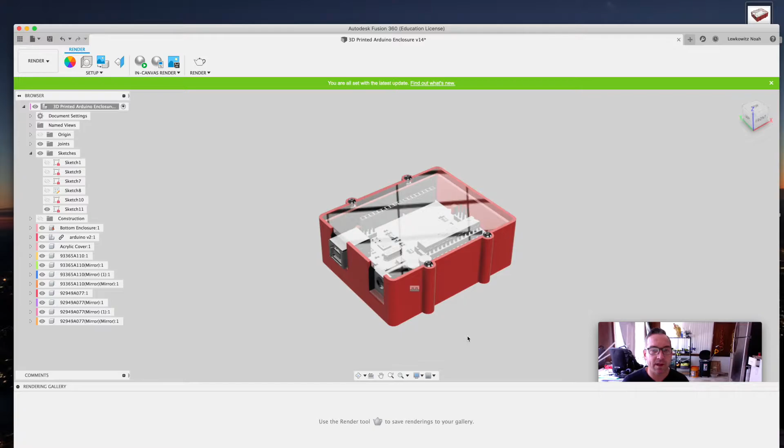And I'm going to show you how to get from where we were last time to this point. So I'll back us all the way up here to where I finished off, which was right here. So we got the cuts in for the Arduino, and that's about it. You can see these rounded sides here. How did I do that, you may wonder? Well, I recognized I wanted to have those added to the part, and you'll see why in a moment.

And the best way to do that was actually to go back in time. This is something you guys should be comfortable with. So what I did was I rolled back the timeline here to when that part was not its own component. So here we are, all the way back in time. It's not a component, it's a body here, body 3.

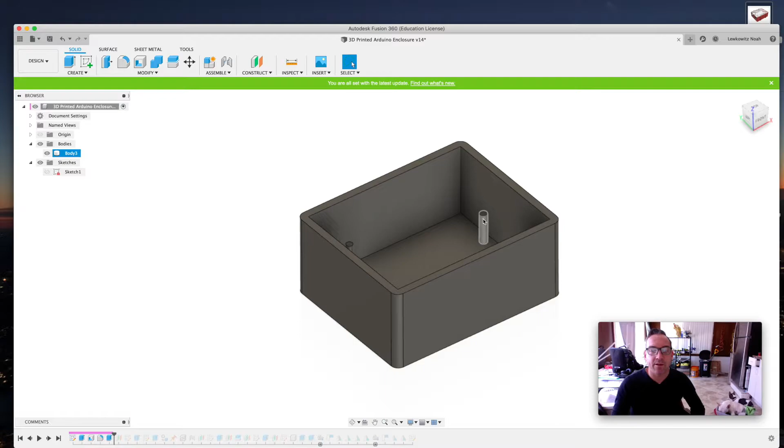I do have the pegs here, but not the standoffs in there. And you can see the rest of the timeline's all set here, but it's grayed out because we can't see it yet. And I brought the slider all the way over here, and this is where I want to begin to do my work.

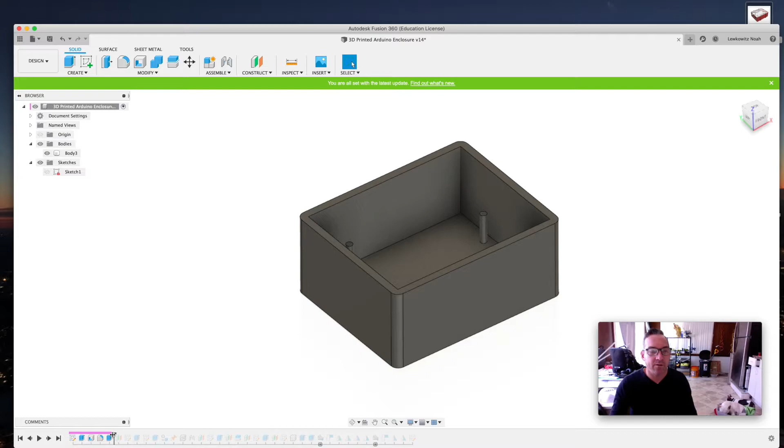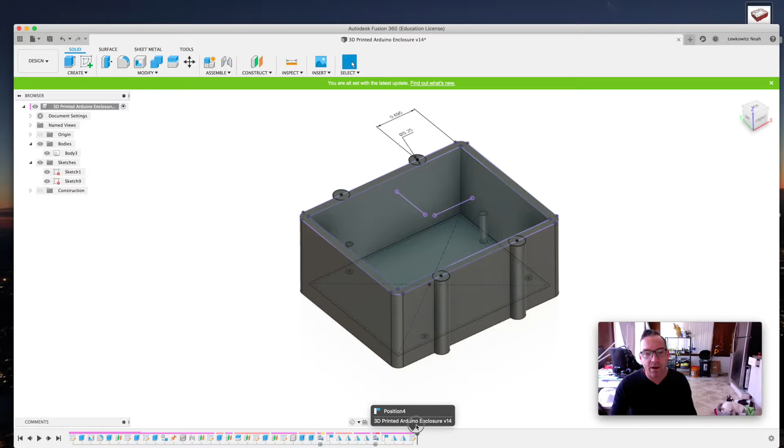So I actually created a new plane off of the top here, which is this move. And then I drew a sketch - let me highlight those sketches so you can see them. Now you can see these circles that I drew. I just gave dimensions to one and then mirrored everything across, so they're all connected. And I moved the slider back up to where I wanted to be, which is about right here. I'm going to hide these now.

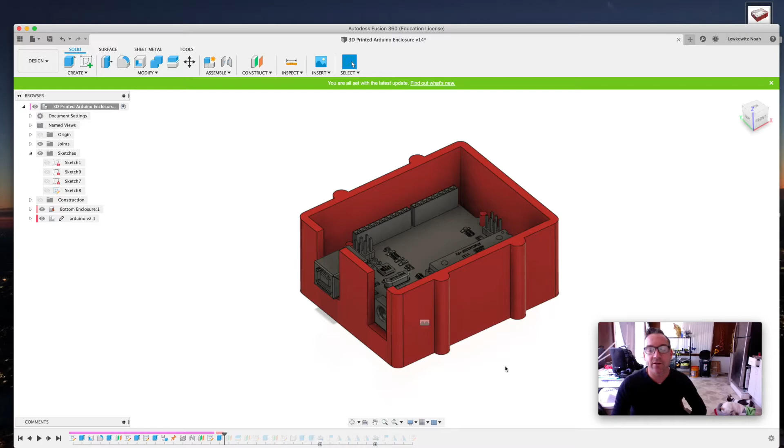So what I wanted to do is adjust the height of the enclosure, and I wanted to add an acrylic top, and I wanted to add some hardware, some heat-set inserts, and some screws to hold that acrylic top on. So the first thing I did was actually creating this plane...

...and I wanted it to be above the highest point of the Arduino, which is the top here. And I wanted to make sure it gave me enough clearance over that, and then another 1/8 of an inch to accommodate the acrylic. So that came to 0.1875 inches. That's where I drew this.

And then I used that to cut the enclosure by using the split body tool, which is here - split body. So you'll see if I scroll back just a little bit here, how the enclosure grows. When I split it like that, you'll see here, if I open up the body panels, I have 2 extra bodies. One is for this part here, and one is for here.

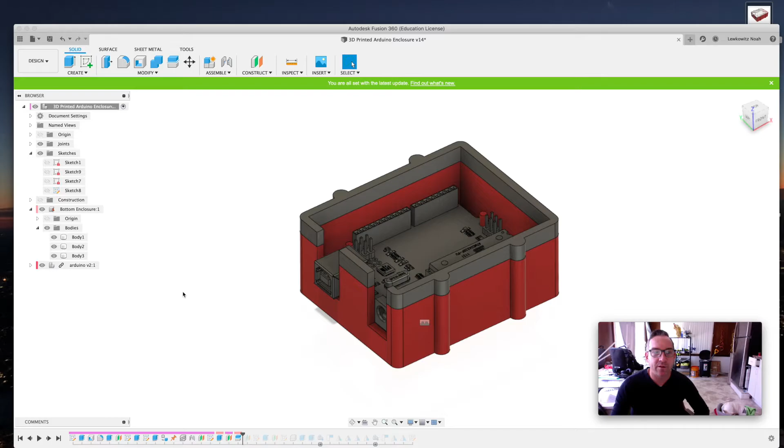You'll see, I'll turn them on - they're gray. So you can see the split line now that I used the plane to split the enclosure to the height I really want it to be. And I'll just turn these off again. So that's how I got the height I wanted of it.

So then I used another offset plane at 0 length, or 0 height, so that it was basically the same plane as the new top of my enclosure. And I used the project tool to project the lines out, and the offset tool to offset them 0.0625. I did have to do some work here to get fillets.

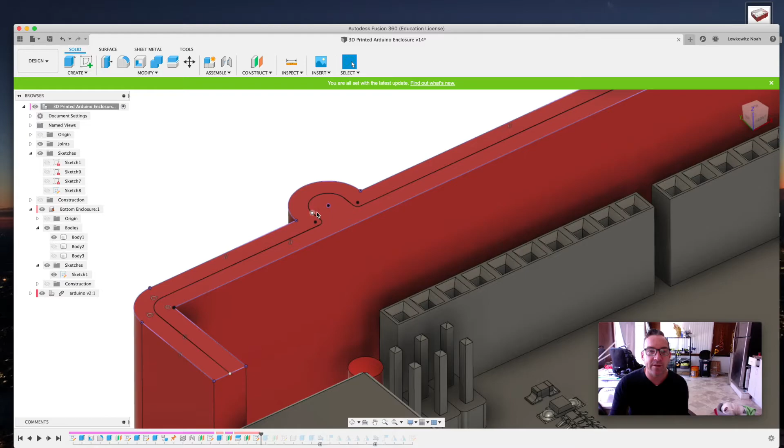On the edges, they came out at right angles, so I actually used the fillet tool in the sketch menu to fix that.

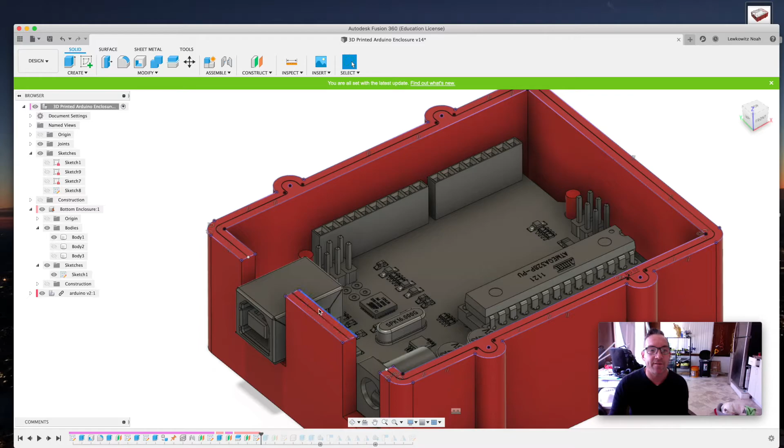Next, I'm going to extrude this down as a cut, both this highlighted section and this part, 1/8 of an inch, to accommodate the acrylic piece that will sit flush with this side of the 3D enclosure.

The next step was that move, and I turned the sketch off. Here you can see I've depressed it 1/8 of an inch so the acrylic piece can sit there. This is creating the acrylic piece.

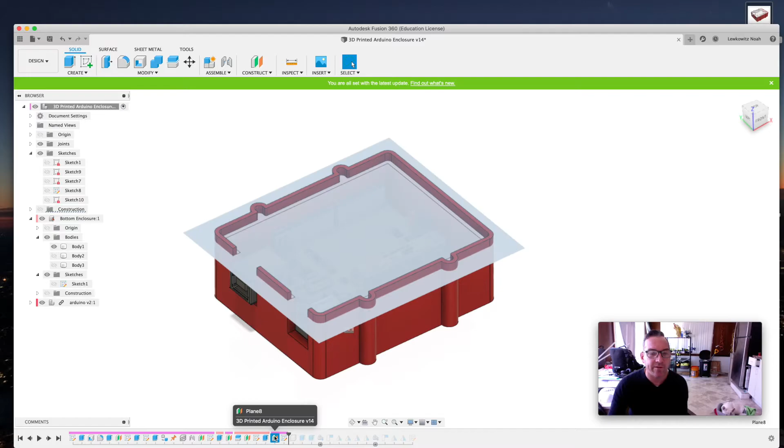The next thing was to create a plane on this edge here, this bottom edge, and use that to create the acrylic piece, then I just extruded that up.

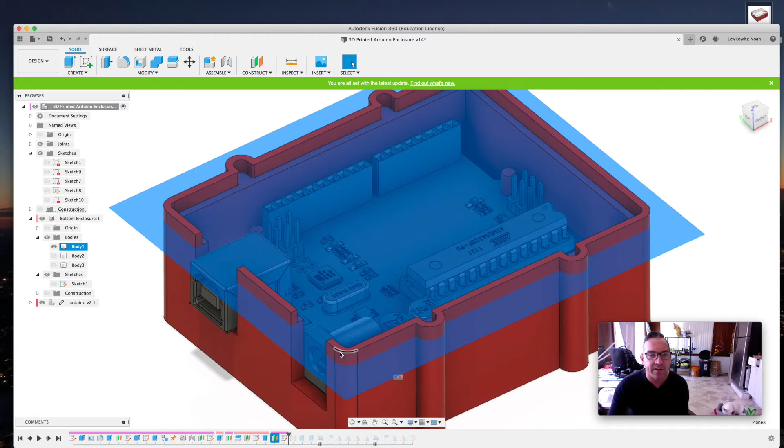I projected this geometry into it, drew a line from this corner all the way over to the corner you can't see on the inside, to connect the space so it turned into one profile. Then I was able to extrude that here.

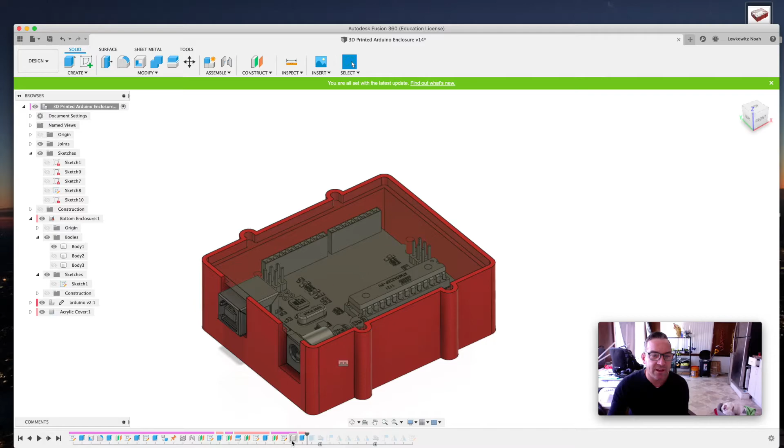It says I turned it into a component, but I did that with the extrude — instead of new body, I said new component. It already did that here, so that's how it was created.

Now I have several different components: the bottom enclosure, the Arduino, and the acrylic top. So all those components are there, and that's pretty much everything needed for the parts.

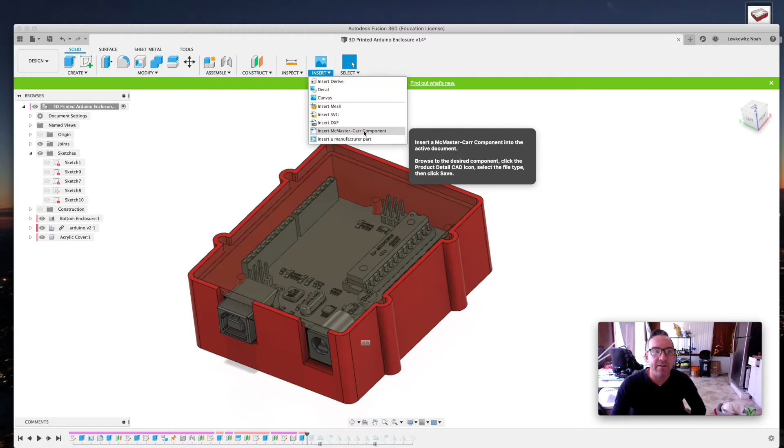The last things I needed to do were add some hardware — screws and heat-set inserts. The place to go is Insert, then Insert McMaster-Carr Component. You can use the pop-up and type in what you want, like heat inserts, and here they are.

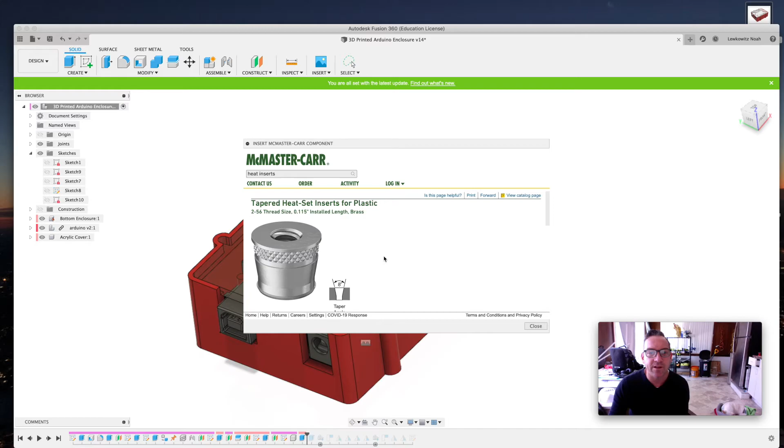You find the size you want — I used 2-56 for this one. Click on it, and you'll see it says product detail next to it. Click that, scroll down to the bottom, and you'll see a drop-down menu. Usually the 3D step file works, though sometimes you might need a SolidWorks file, but I've had a lot of luck with the step file.

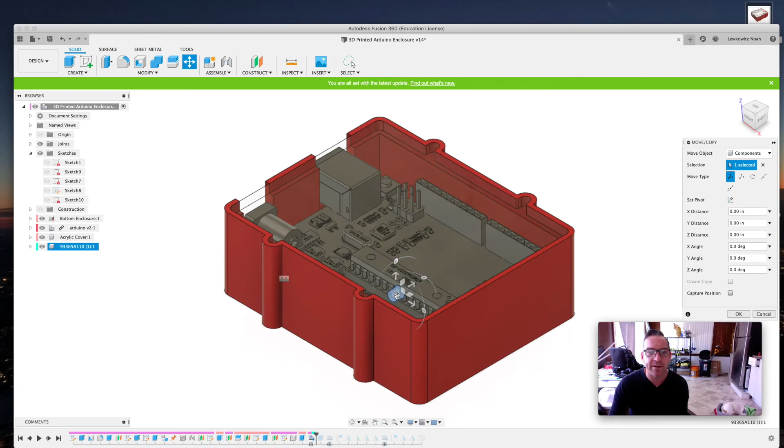Just click save, and then that object is placed in our file, and we can maneuver it around and place it where we'd like it to go. So here you can see it now — there's one, and I did these.

This is a series of mirrors to get them into the 3 other remaining positions. So you'll see that happen here — hopefully. There they go, it's taking a second. Now they're all in.

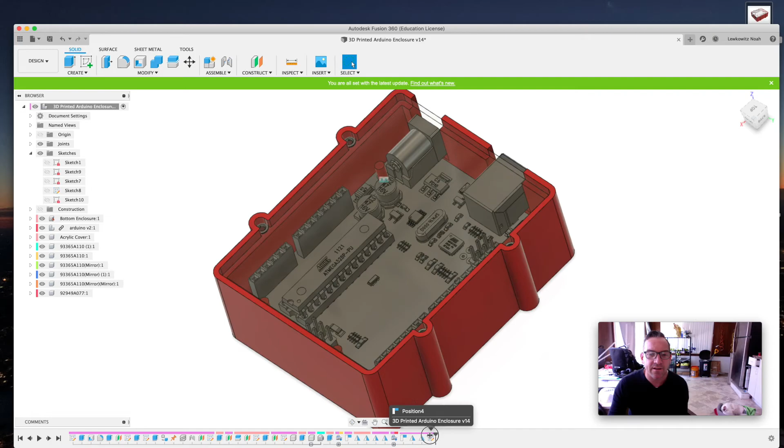And then I wanted to add screws, so now you'll see the screw came in. There it is, and I've moved it and mirrored it, so now it's showing up there.

So that's how I got from the last video to this video.

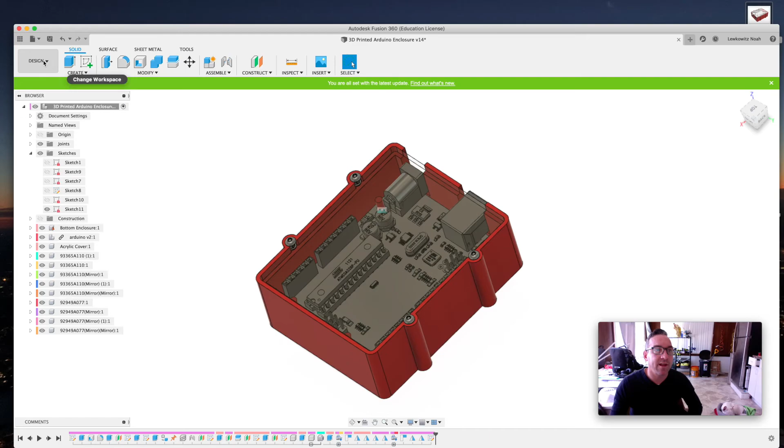The last thing I'll show you is now we can take this into the render area, and we can actually get some nicer views of the object.

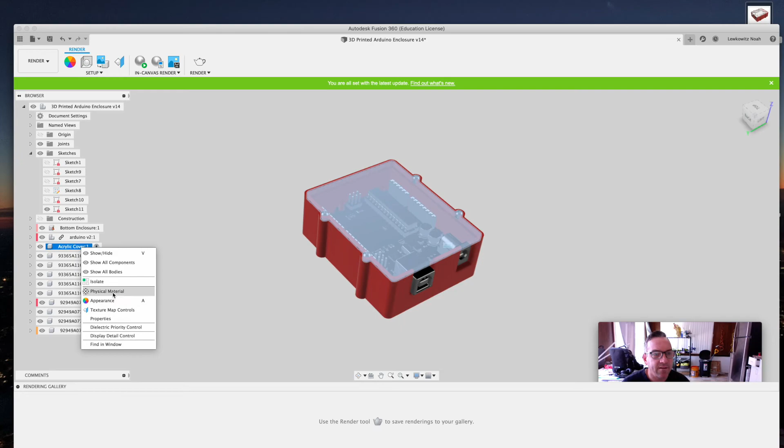You can set the component materials. So here, like the acrylic cover, we turn that on, and I can say physical material, and then tell it what I'd like it to be. You simply drag these over onto the material, and you're left with nicer views, which you can save out by capturing the image.

You can also make them a little nicer by rendering them here, clicking that render. It takes a little time, but you could do that as well.

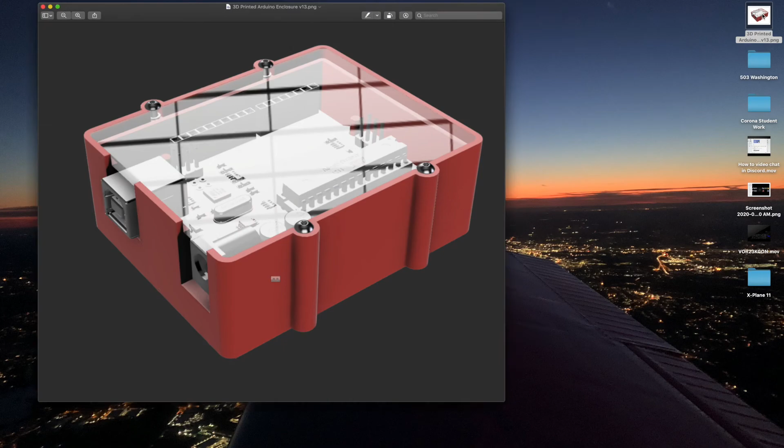Just to show you here, I've rendered this one out, and I get a nice image. You can choose for it to be on a blank background, and then it looks kind of nice. You'll see it posted in the Fusion 360 channel on Discord.